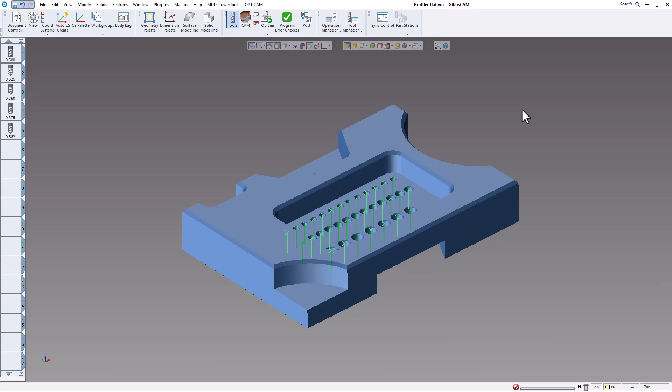In this week's GibbsCAM video, we're going to show you how to use the profiler properly. We have a part here. It's a SOLIDWORKS part, and of course if you bring it in on SOLIDWORKS, if you have any kind of holes, you will get these little green check marks and lines going through all the holes in the part. You can keep them there, won't hurt anything, but if you want to make them disappear temporarily, you can go to the View menu and just turn off Show Hole Features.

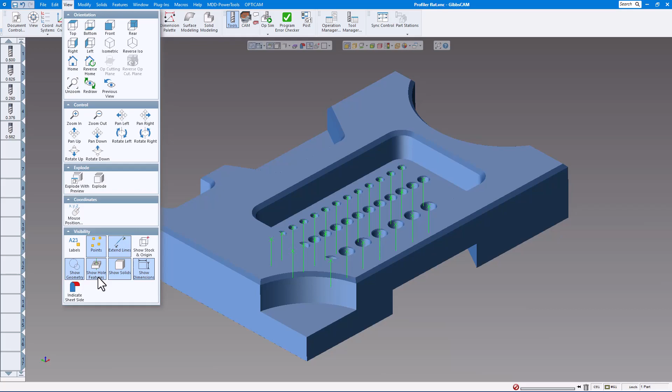That makes them disappear. So everybody that has GibbsCAM Go Solids or Go Pro Solids will have the profiler in their menus. If you just have GibbsCAM milling with no solids, you won't have this, but most everybody now has Go Solids or Go Pro Solids. So you will have this profiler down here. Now there's a drop-down menu on the profiler. There's either slice, slice spun body, slice silhouette, slice cylinder.

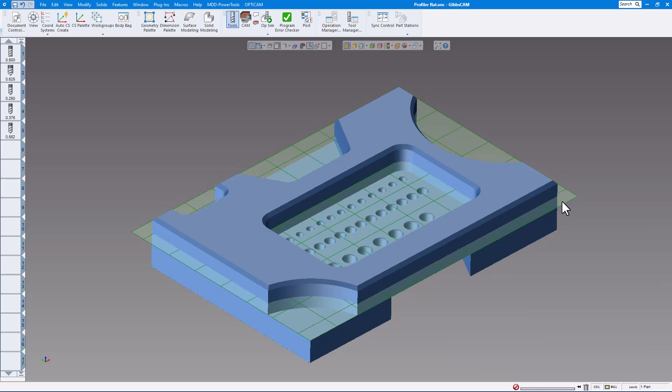So on the slice plane, if we turn that on, you can see you can grab this and pull it through your part. I have other videos on how to use this as well. You can also right click and then say extract the profiler or go to a profiler depth. And you can always use the Alt key, click on a surface, click apply, and it'll force that profiler down to that surface, and you can pull the geometry off that surface. And of course you can also drag it. You can also profiler select all the profiles and extract it if you'd like, or you can also just extract the profile off of one edge if you'd like. So you have a number of choices there on what you'd like to do.

But let's say we want to cut the periphery of this part. So by dragging it through the part, you can see I can get this. Of course I don't want that. I want to cut the outside of the part. If I turn on my stock, you can see I have about 1/8 of an inch of material on the whole outside of the part, so I want to machine the outside of the part. So if I pull the profiler down about here, it looks good for most of it, but then it has this and this. So if I pull it down farther, then really no solution for that.

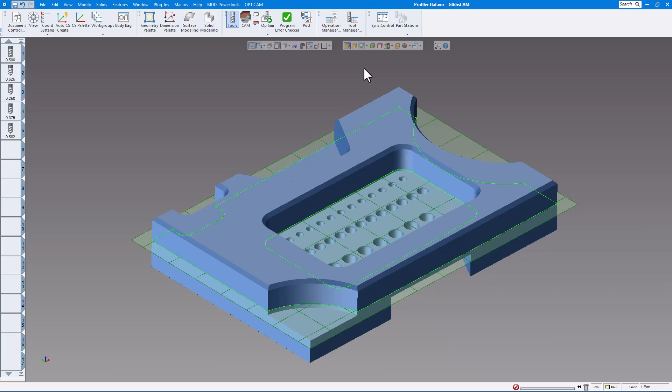So that's where the profiler comes into play on what they call slice silhouette. So if you do slice silhouette, it's just what it says. It's like a silhouette. So if you drag this, say, to the very bottom of your part, it's going to look at the whole outside of the part like a silhouette, and there's the geometry you need to cut it. Now you can extract the geometry if you want by clicking on it and extract the profile, but you don't necessarily have to. So let's say I want to machine the outside of this part now.

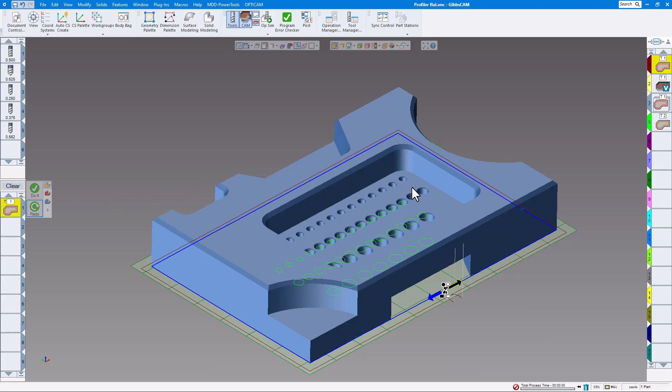So if I bring up my process, I can click on this profile right here, and notice it does not give you the 3 circles that Gibbs normally gives you. It just gives you the climb mill or conventional mill, either way you want to go, and the start and end points are there, and you can also move them around just like you do normally. But Gibbs already knows this is an outside profile, so you're not going to get the 3 circles on there. So if we just click on do it, we'll have the toolpath around the outside of that part.

Now if I go to the rendering and just render that part, you'll just see that render so far. Let's turn on the profiler. We'll rewind it, play, and so you can see we are cutting the outside periphery of that part so far.

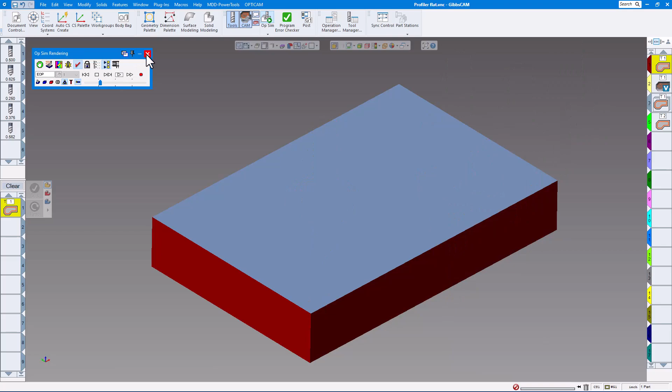So the next thing I want to do is machine the rest of this part, and we're going to use a couple of tools, just a 1/2 inch end mill to rough it out, and we're just going to use the same end mill to finish it. Now you can use the profiler if you'd like.

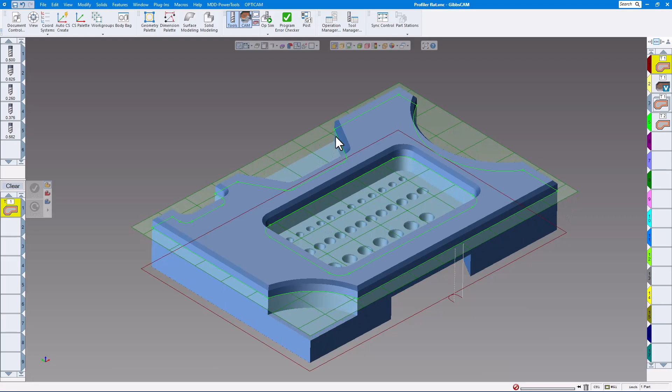Let's just drag it up there if we want to use that. We could highlight each one of these, but it's easier on this. Let's just turn the profiler off altogether, and let's turn face selection off and just select the whole profile there, or the whole solid body.

Now we're going to do 2 different operations here. We're going to rough this all out and then take a finish pass on here. So let's bring up the processes here. I'm going to use volume mill, and this is my part's 2 inch thick, so I'm going to say you can go down to 2 inches if you need to. I'm going to side mill cut. I'm going to leave a little stock on the X, and Z will take to finish, and minimum toolpath, etc. But I'm going to say hit flats by adding passes.

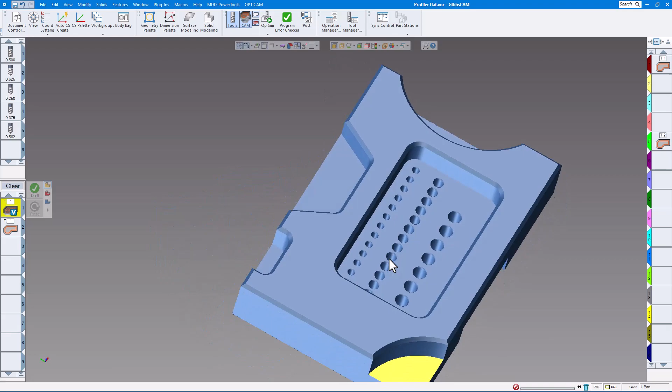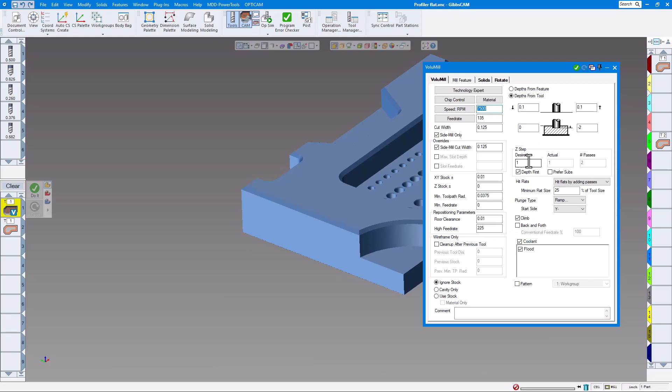So since each one of these surfaces here, let me turn on face selection, that's a different depth than this, and a different depth from here, and this is a different depth as well. So by clicking on hit flats by adding passes, it'll change the depth. But I want to go down about an inch at a time, so it will adjust that how it needs to make sure we hit the flats on everything there. So we're just going to click on the whole solid, and we're just going to click on do it.

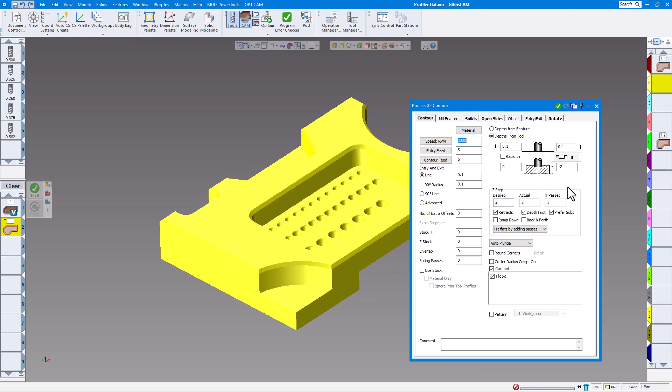And I'm just going to take a finish pass as well on here. Let me bring that up, and I'm going to again say you can go -2 inches, but add hit flats by adding passes. So we're going to take a finish pass on there, so we'll just say do it. And it's running the process here. And now we have our roughing and our finish process on there.

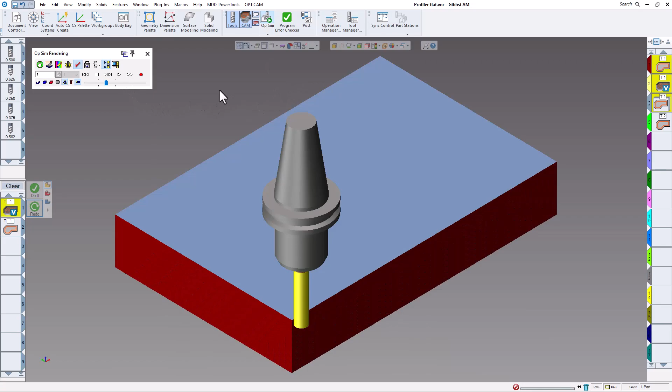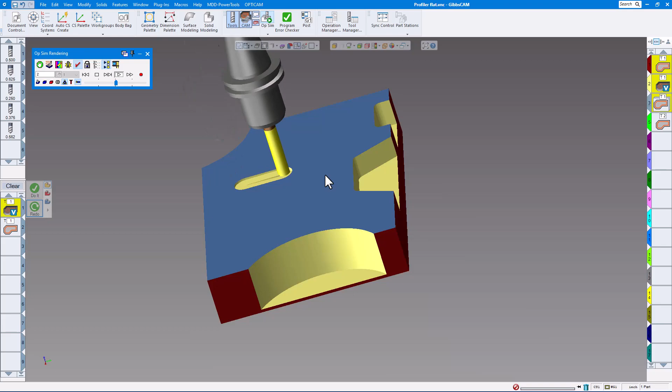So if we go back to our operations, we can now see it got the outside and of course all the steps. And you'll notice it'll adjust the steps as it needs to. Take another heavy cut on the outside there, and of course take our finish passes, once it finishes this cavity here. Then of course the finish pass on all there.

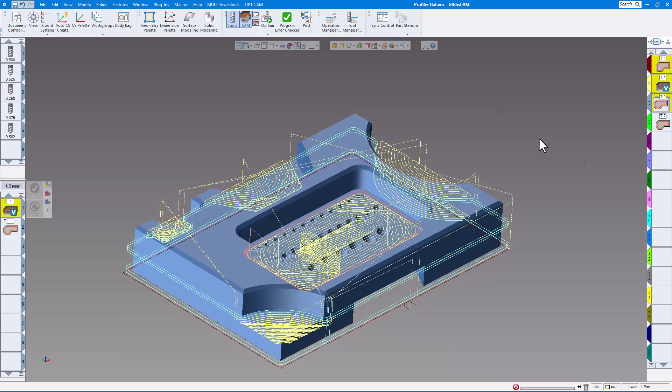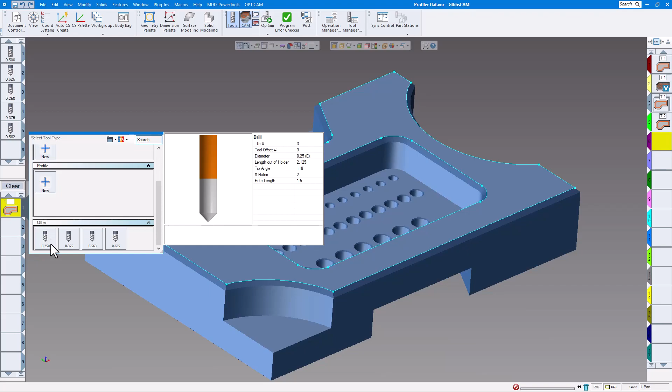Now let's choose a blank tile here. We have a chamfer around the part there, so I'm just going to click on face selection here, and I'm just going to extract the geometry off that. And we're going to clear this out. I'm just going to use a contour with our tool we're using to chamfer with. I'm going to go down to -0.3,

and we'll do a little bit of an arc in and arc off on there. And this time we're just using geometry. We could use a profiler as well, but I'm just going to use geometry on here. And we'll click on do it there, and now we have our chamfer.

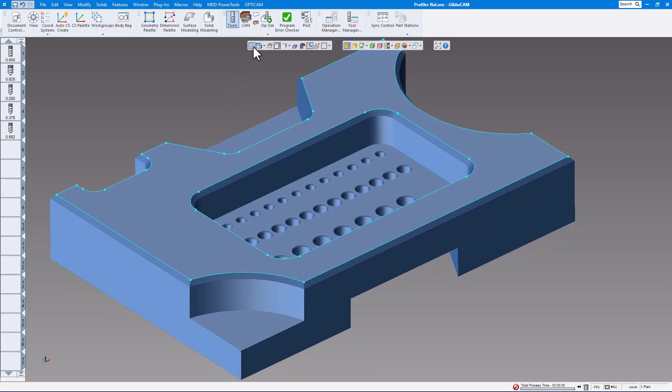So the next thing we want to do is machine the holes now. Now I'm going to show you how to use the hole manager here. So let's turn off our cam for just a minute there, and I'm going to actually turn off the geometry to hide some of that. So next we want to do the holes in this part. So we have 3/8 holes, 1/4 inch holes, and 7/16 holes.

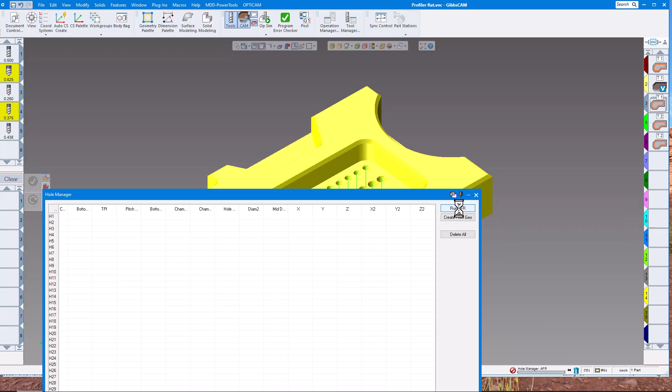So let's bring up the features and hole manager. Now if this is blank, all you need to do is click on the solid, make sure the whole solid is selected, not on face selection, and click on Run AFR. And that's going to find every hole in that part with the chamfers and everything else in there. As you can see, it found all the holes in there.

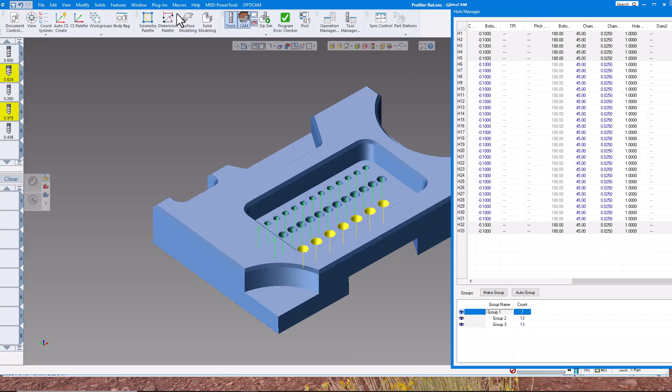So what we're going to do is click on Auto Group, and it's going to create 3 different groups in this particular one. And group number 3, you can see it highlights all the 1/4 inch holes. Group 2 highlights all the 3/8 holes, and the last group all the 7/16 holes. So we're going to use Hole Wizard. I don't want to use Auto Wizard. Don't use that too often. I like to use Hole Wizard, where it steps me through everything so I can see what it's actually looking at. So I'm going to click on Hole Wizard, and this is going to be the 1/4 inch holes.

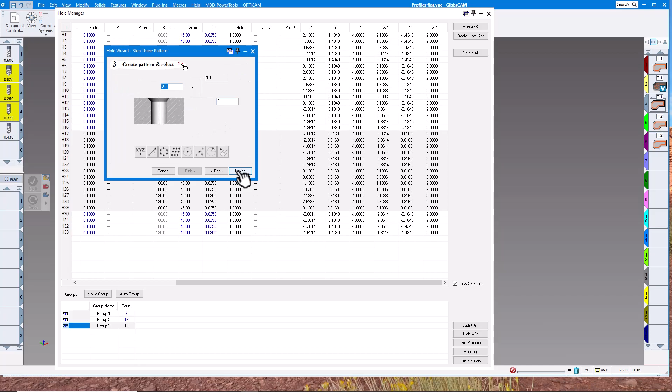So I want to do a spot drill and drill, not do chamfering. Spot will chamfer the hole already, so click on Next. Everything there is good. Next. Build the processes. Now one thing you need to do is open this process, hole features, and adjust for the tooltip there. So we'll click on that. Build the operations and finish. So now we have the operations over there for the 1/4 inch holes.

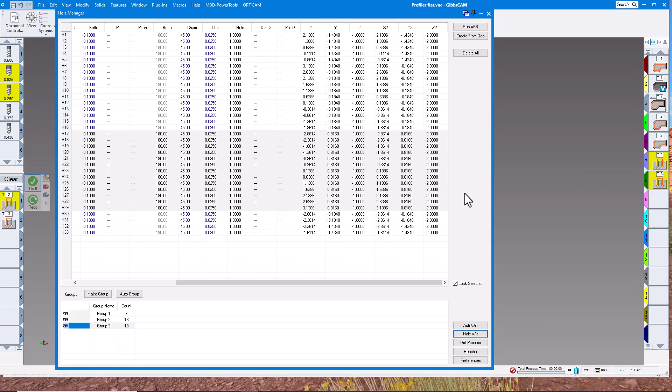Okay. Now we're going to select an empty tile over here, clear this out, and let's go to group number 2, which you can see it highlights all the 3/8 holes. So again, let's do the hole wizard. Next and next. Build the operations. Let's adjust for the tooltip there.

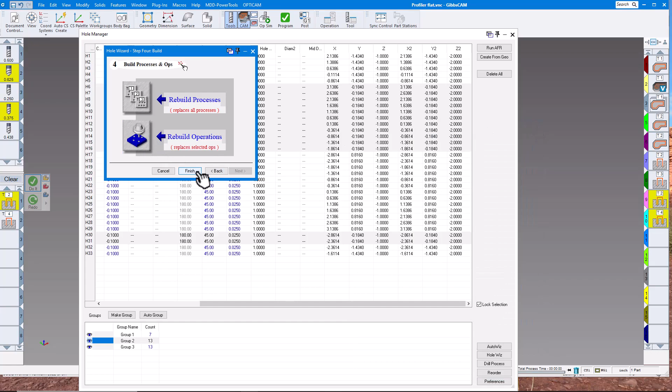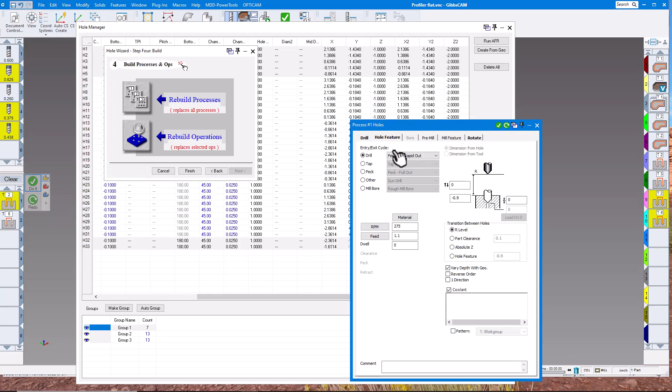Build operations and finish. Now we're done with the 3/8 holes. Now the last one is group number 1. So then let's go through hole wizard. Next, and clear this. Rebuild processes. Open this up and adjust for the tooltip. And rebuild operations, and we should be good to go. That did the 7/16 holes.

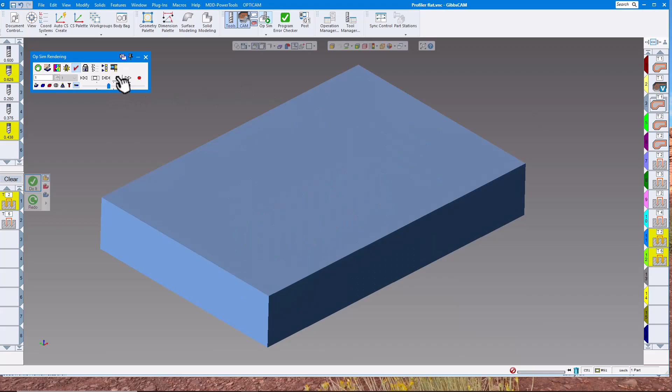So now let's go to render and take a look at everything. So we'll start right off from scratch. And we'll slow it down when it gets to the holes here. Okay, slow it down, and you can see here's the 3/8. And of course the 7/16.

Now, to save a little time, since we're using the spot drill on all these and then doing a tool change, it'd probably be easier to put all the spot drills in one spot. So in order to do that, just go anywhere on the operation list, right click and say sort operations, and that's going to sort them all in the correct order, so all the spot drills are in the same order before it does a tool change. So it'll eliminate a little bit of tool change there.

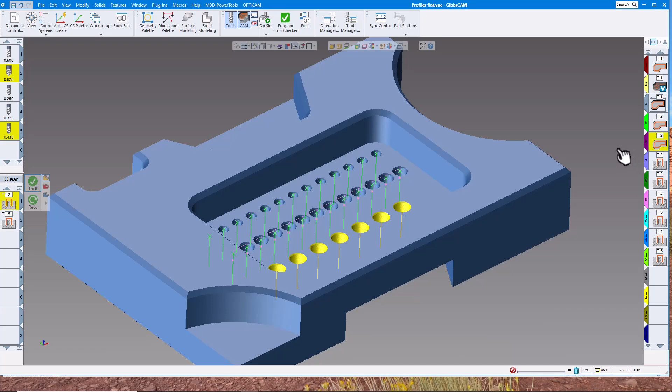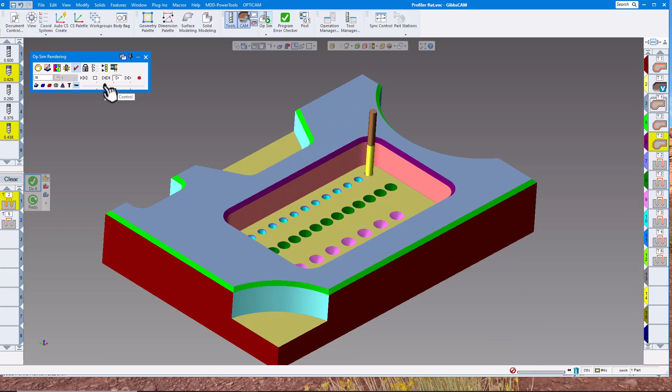So let's run the rendering and you can see what that does. So we'll speed this up and we'll stop when it gets to the holes. So let's just slow it down a little bit. Now you can see we're going to spot all the holes first, and then of course drill all the holes: 1/4, 3/8, and then 7/16 there. So that's a little bit on how to use the profiler on the mill.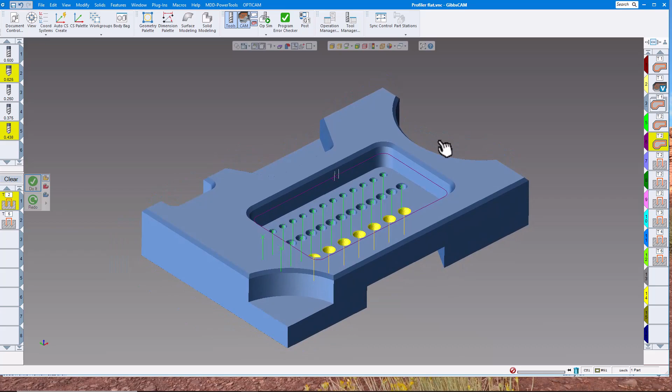So let's bring up a lathe and we'll show you some things on lathe that makes things much easier to use. So the next part with the profiler is how to use it on a turn part. So here you can see I have a turn part, kind of like an MTM part. I'm on the ZX plane, so that's the turning plane, as you can see.

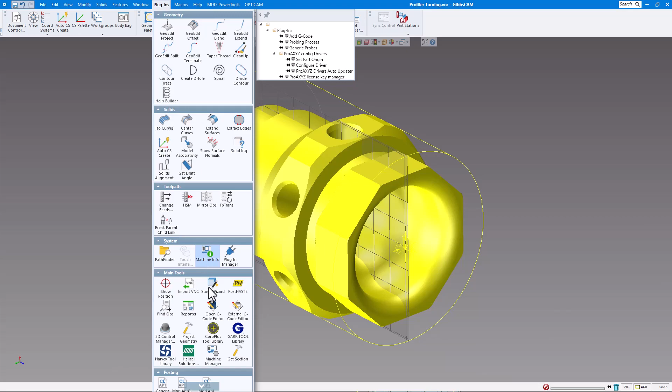Now we do have the get section in here like we've always had. So click on the solid, go to get section, and the default there. But the problem with the get section is you can see it sliced it right through the body there. Of course, if we were to turn this at this diameter, it would cut these corners off here, and it sliced it down through the holes. So we'd have to do quite a bit of cleanup here to get things to cut right. So normally I don't use get section anymore since the profiler came out years ago.

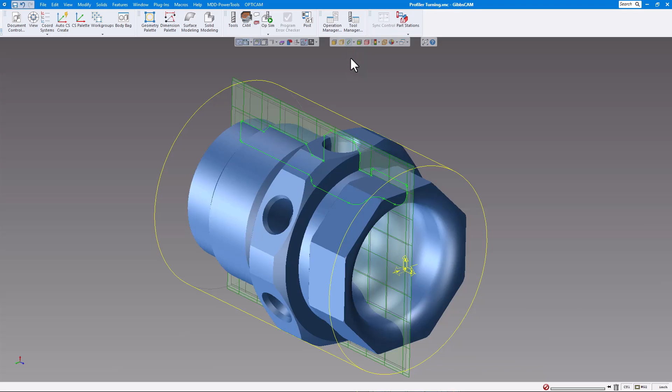So on the profiler, let's just do the OD first like we're turning. So if we go to the drop down menu and click on this button right here that says slice spun body, Gibbs will look at this part as if that part was turning in a lathe. So if I click on that, you can see the profile here. And if we turn this, it would match everything here perfectly, and we'd have a good looking part there.

Now you can always click this and right click and extract the profile if you like, in case you want to do some measurements or something. There's the profile for turning. As you can see, it's a little higher up here because that's what it would look like on this surface here. Same with here. Okay, let's delete that.

Now let's say we want to do milling on here, say from the face, come in with the end mill and cut the flats here and the flats here. So first of all, you want to make sure you're on the correct plane. So let's go to the XY plane. You can see that's the front there, the XY plane.

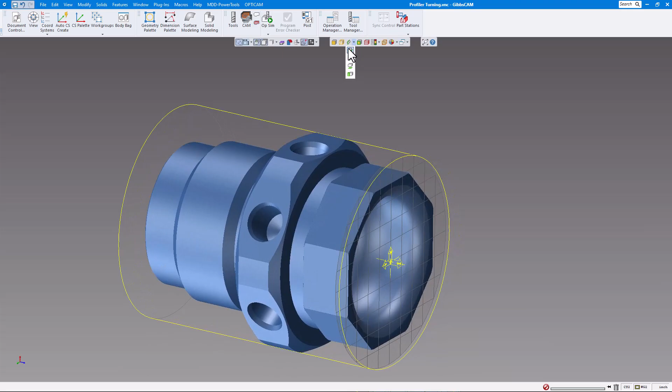And if we go to the standard slice plane, we can drag this down through our part anywhere on here. We can also, of course, right click and do a profile depth, either way we'd like to do it. But for this particular part, we can just drag it anywhere through here. So we could click on that, extract the profile, turn the profiler off.

That looks good. So there's geometry to cut the flats. Now let's say we want to cut flats on this again, coming from the face with, say, an end mill. So we could take the profiler, drag it through here. That doesn't look so good because it's slicing it through the holes there.

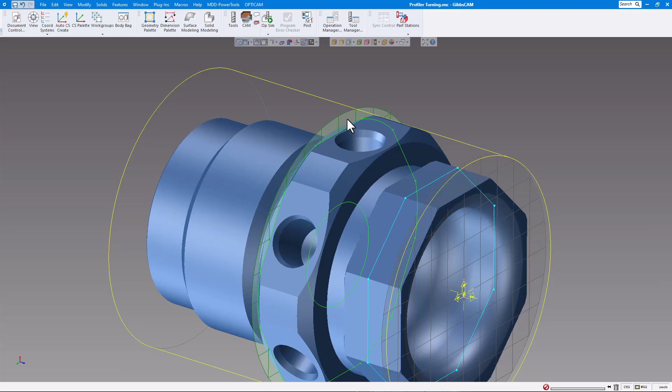Let's say we bring it back a little bit farther. Can't quite get even with the outside here and here, so we're going to have an undercut there. So if we tried to mill that, we'd be cutting into this surface here. So that's another reason to use the slice silhouette. So if I click on that and drag the profiler just maybe a little bit past it,

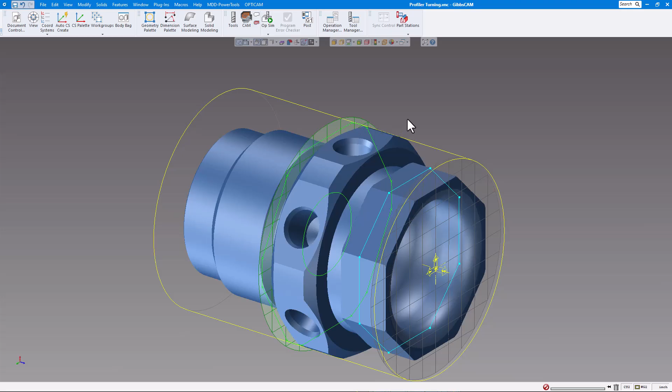you can see it looks at this surface like it was a profile, and you can see that matches the part perfectly. So then if we want to, we can extract the geometry off that, turn the profiler off. If we want, we can actually put this by going to force the depth. I'll click on maybe this surface here. If we want to bring that over to this surface here, that's easy to do.

Again, if we want to do this with the end piece, we could do the same thing by alt-clicking on the end there. Of course, that would be Z0. So now we have it placed where we would like it. It doesn't really matter. You can have it here or here, but it's more customer preference what you would like. So there we have the hex on the end and also down here.

So that's an easy way to use the profiler. So much easier than doing the slice on that. Makes it easy to machine. Now the next lathe part we're going to do is show you how to unwrap geometry or cavities on a turned part. So that'll be next.

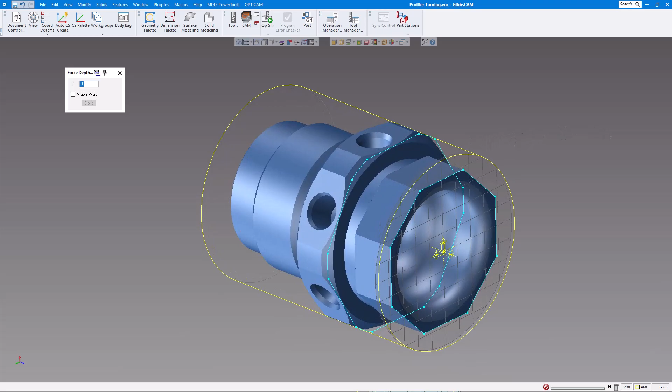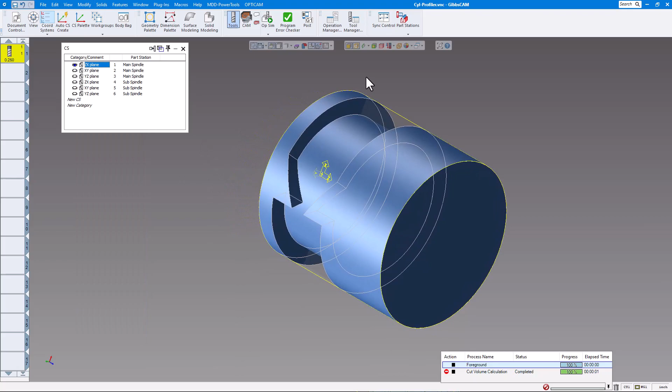So here is our turned part that we want to do some polar and cylindrical milling on this cavity right here. So in the past you could click on the edge selection, select the edges, then go to modify and unwrap. But if you want to use the profiler, which makes things much easier now, we don't need to do that. Here's our part. Make sure you're on the XY plane though, whereas before you'd be on the YZ plane.

But now we'll be on the XY plane, and we'll click the profiler and go to the very bottom where it says slice cylinder. Now the slice cylinder, the only thing you need to make sure is you have the profile at the depth that you're going to turn to. So in this case it's 2 inches. You can of course right click and say profiler depth, and in this case it's 2 inches.

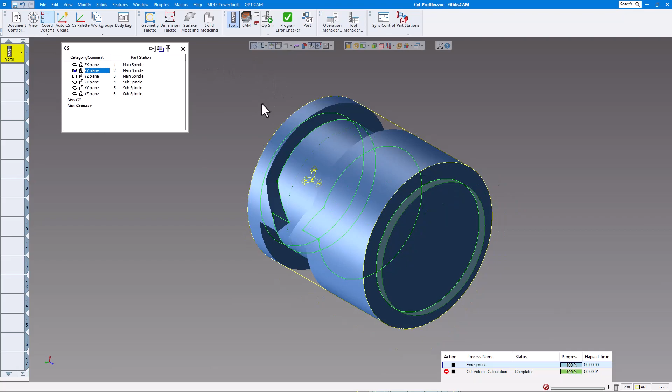You can either slice this and measure that, or if you have a print you can see what this diameter is. Let's do this again. We could do profiler depth, 2 inch, apply, and it's down at 2 inches there. So all we need to do now is our CAM section. Let's open up our VoluMill.

And of course on the rotate tab we want to make sure we're on the YZ plane, because the tool is going to come radially on the part. And we want to make sure it's on polar and cylindrical milling. And of course this is where your depth will be 2 inches. This is from center line, so basically radial from the depth up to that surface is 2 inches, and up to the outer surfaces is 2.5 inch, and this is a radial value.

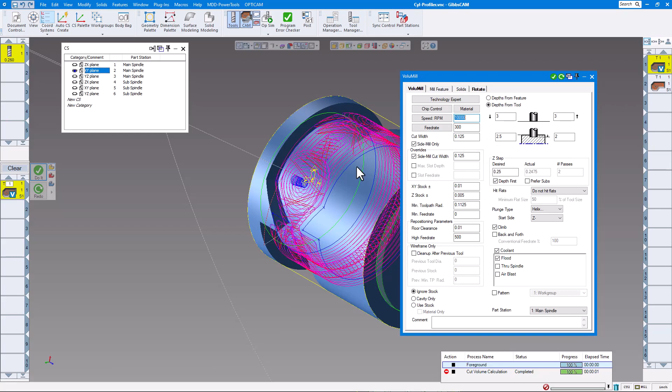And of course you machine that. When we finish off, the same thing here: make sure you're on the rotate tab, YZ plane, polar and cylindrical, and then if we run the simulation there, we'll rewind and play. And this of course is VoluMill doing polar and cylindrical.

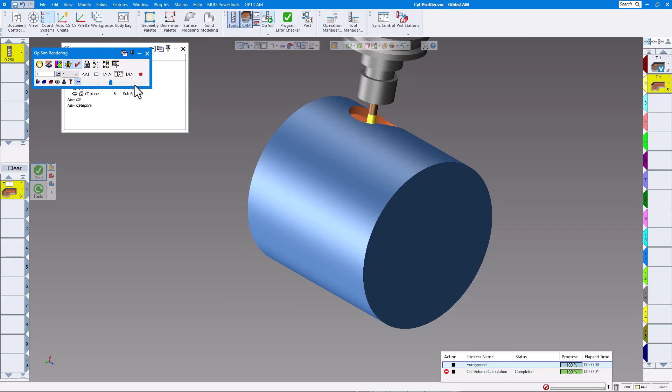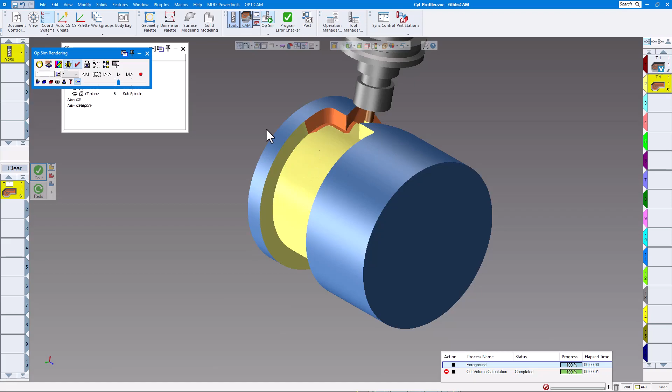And then of course finish pass on here. Of course we want to clean up the bottom surface as well, so that's why we selected roughing to take a finish pass on here. And then you have your part finished on there for polar and cylindrical. So that's how to use the slice cylinder for doing rotary milling on the outside of a part.

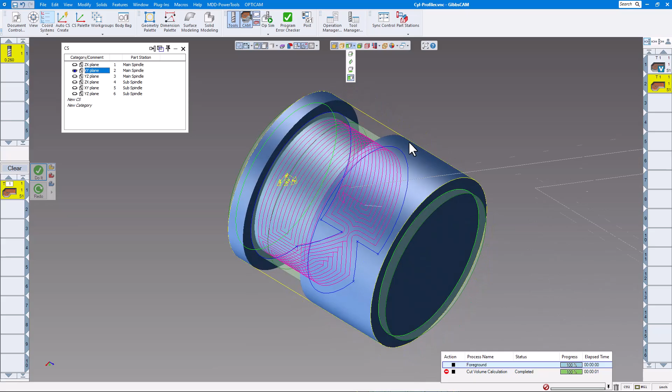So you can see the toolpath there, looks very nice. Click on the VoluMill, same thing there. So that's kind of how to use the profiler successfully on not only turned parts but milling parts as well.